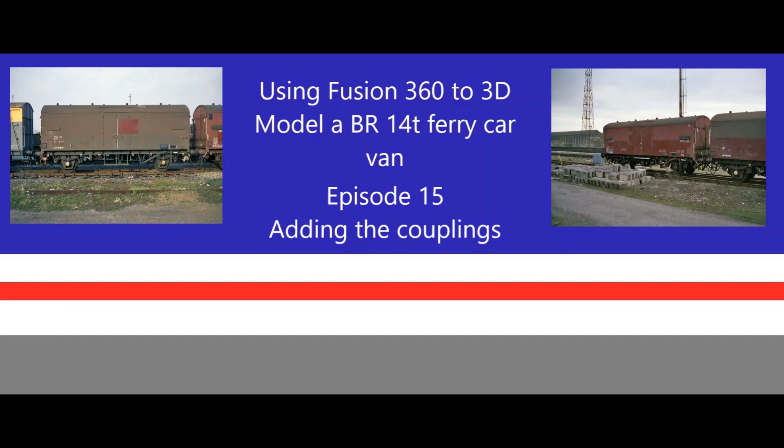In today's episode, I'm going to start by adding on the couplings and looking at some of the smaller details potentially that we can add in on the underframe and around the buffer beams.

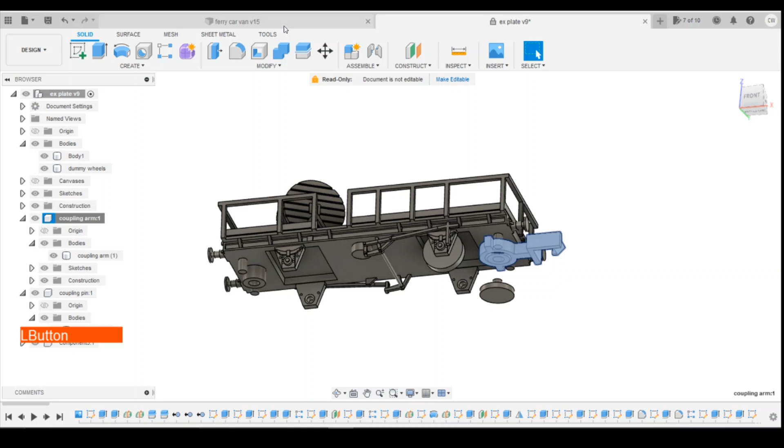So for the coupling, what I'm going to use is the coupling arm we designed for the electrification van a few episodes ago. So I'm just going to go and select the component, copy, come into the Ferry Car, and then paste new, and that should put the component in here. It's already listed as coupling arm, and then we've just got to move it around until we've got it in the correct position.

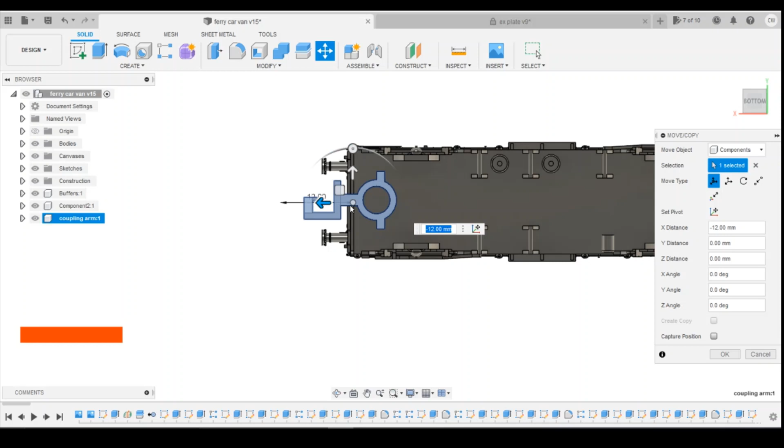So starting off, just going to move it across. I'm going to have to extend the coupling arm by the looks of it, so that the back of the coupling comes in line with the buffer here. So position wise, 12mm looks okay there. Left and right looks okay. We need to bring it up.

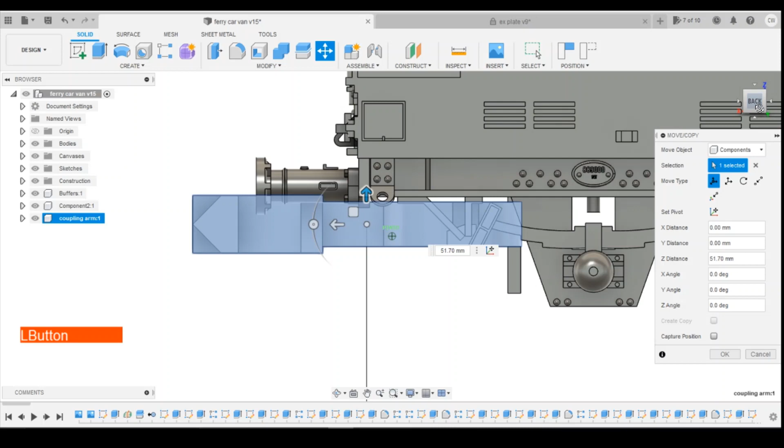Again, I'm not looking for perfection when I'm putting this in place, because obviously the coupling pin will be sitting through underneath. Okay, so I'm coming up to 51.7. Have a quick look round. Looks okay.

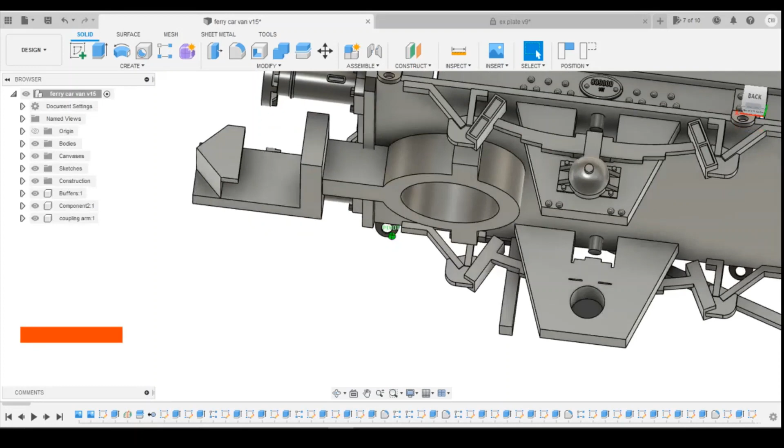Okay, so you can see how we've got this bit underneath, which is going to clash with the buffer beam here. So we've got two choices. We can either cut out some of the buffer beam, or we've got to do some work around the coupling to make it fit. I'm sort of inclined to go with making the coupling fit. So what I'm going to do first of all is cut the coupling.

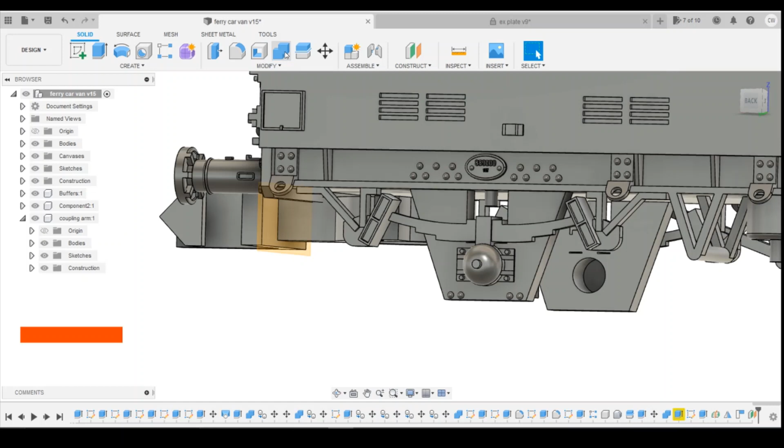I'm going to capture that position, create an offset plane on the back of the coupling face, and then I'm going to split that body using that offset plane. Should have two bodies now. I'm going to move the actual coupling itself to the left, so the back of the coupling is in line with the buffer, so you don't end up with buffer lock. For me, it's going to be about 2.1mm.

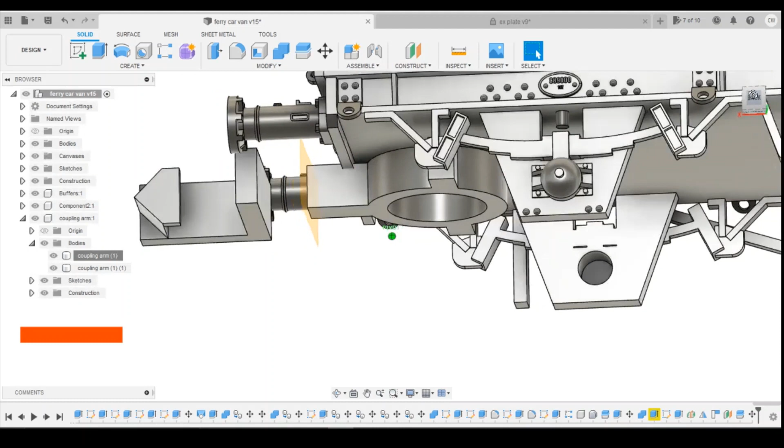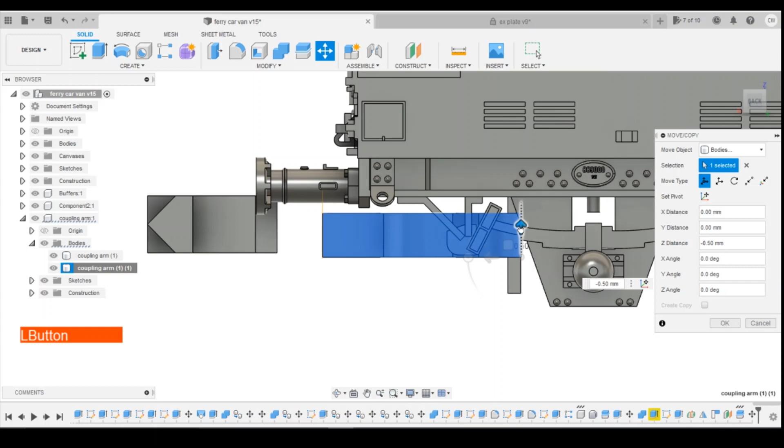Okay, and then I've got to work out what I'm going to do about this sitting underneath. So what I think I'm going to do is move this down. Move the body here, move that down. Yeah, by 0.5.

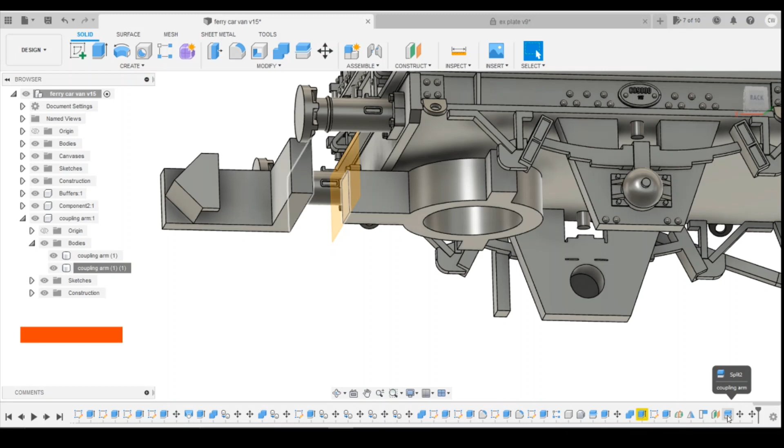Tell you what I will actually do, because I'm going to cheat slightly on this. I'm going to move this offset plane slightly. I'm just going to bring it in here by maybe 0.5, and then when it splits, I've got two faces, and then I can turn that construction plane off. This one. And then I can loft between those two faces.

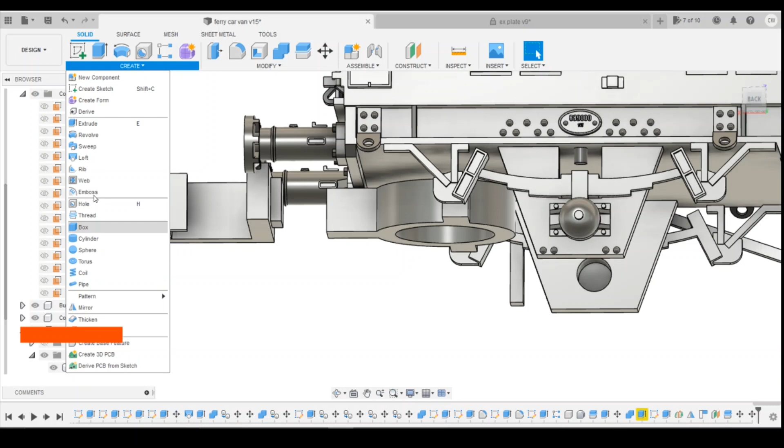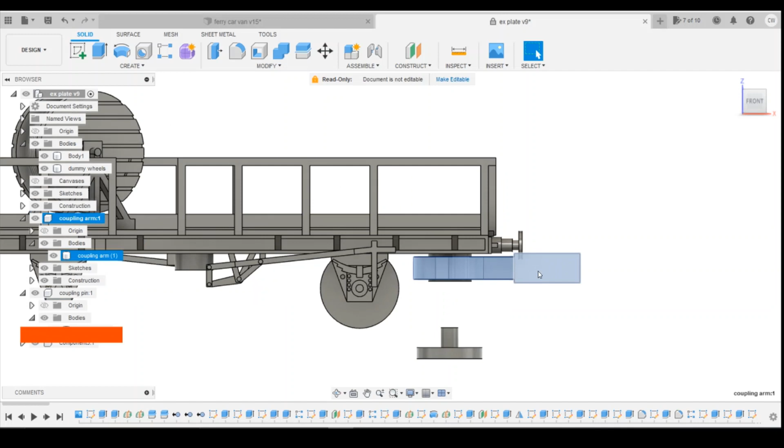So from that one puts that diagonal loft in there, which, although the pocket will be lower, brings the coupling up to the same height as what I would normally require. As you see, the coupling sits halfway through the buffers on everything, so that's going to work best.

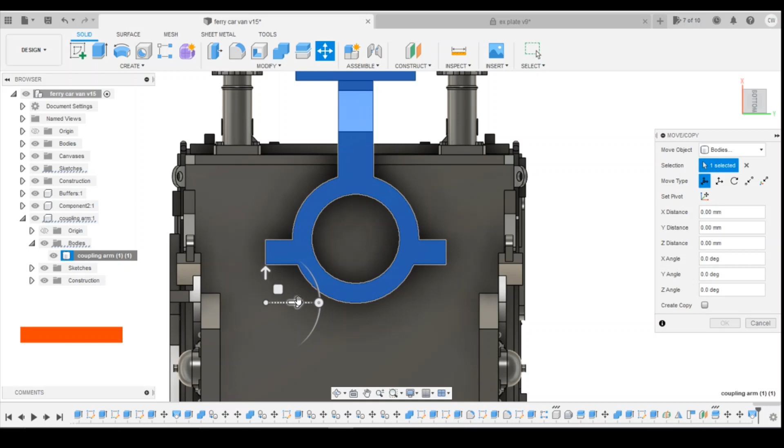Just wanted to try and centralise this a little bit. I've noticed it's a little bit offset to one side, so I've done some calculations. It's 3.36mm from this edge to the side here, 2.74 from this edge to this side. So I'm just going to move it across to the left. So I should be able to go minus 0.25.

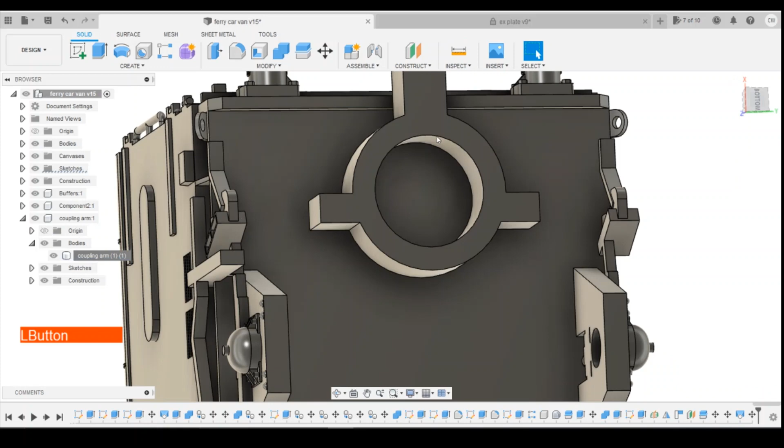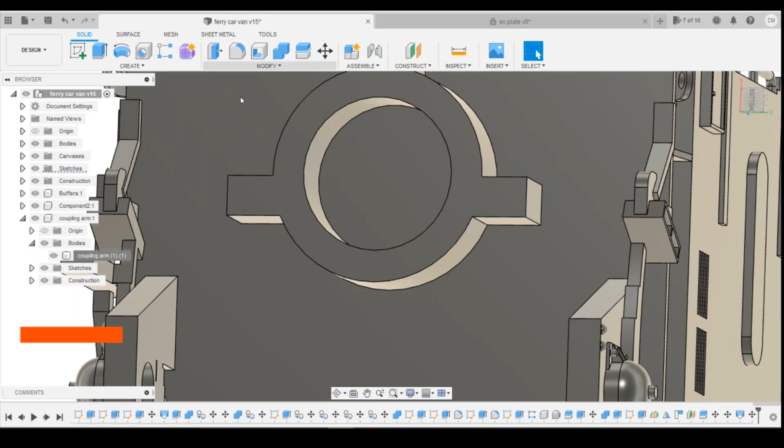And if I do the same inspection here, I'm going to check from that face to that face, I should have 3.11. Okay, doesn't make sense. Why? Yes, that's right. So 3.11. Inspect there to there. 2.99, so it's 12 difference, so it needs to go 0.06 to the left again. So I'm going to do another move on that coupling arm.

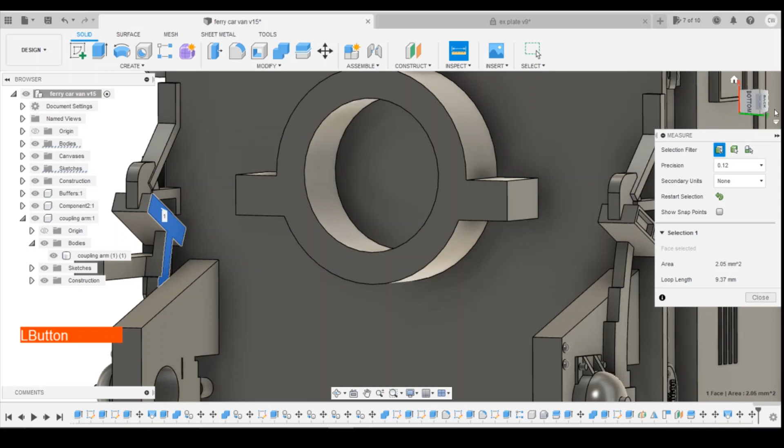Check that, that way. So minus 0.06. And that should now be spot on. There to there, 3.05, and inspect on the other side from there to there. Should be 3.05. So we're centered there. So the next thing I'm going to do is put the center boss in here.

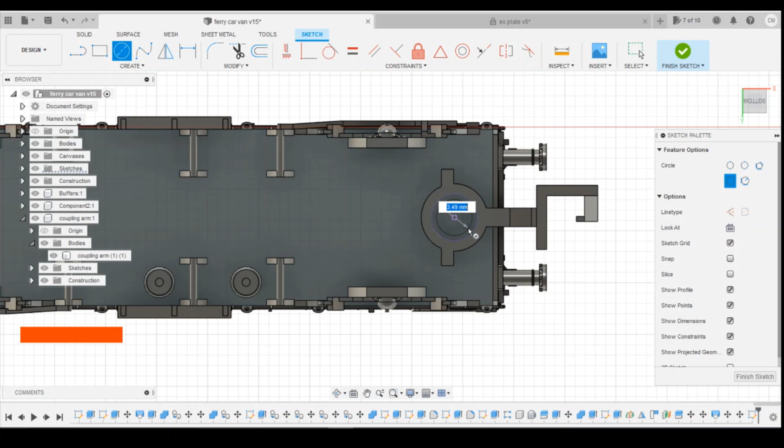We'll create a sketch on the bottom surface. I'm going to project the circle so that I get the center point, and then draw the circle in. So it's going to want to be 4 millimeters, I think. It's a 4.6 hole, so 4 millimeters gives me a little bit of play. And I'm going to extrude that to the same height as the coupling, and actually going to put just the tiniest little bit more on so that it's got a little bit sticking out. Type join.

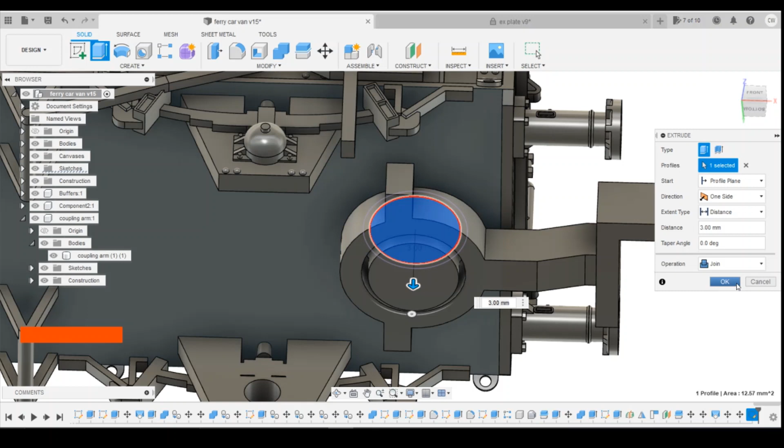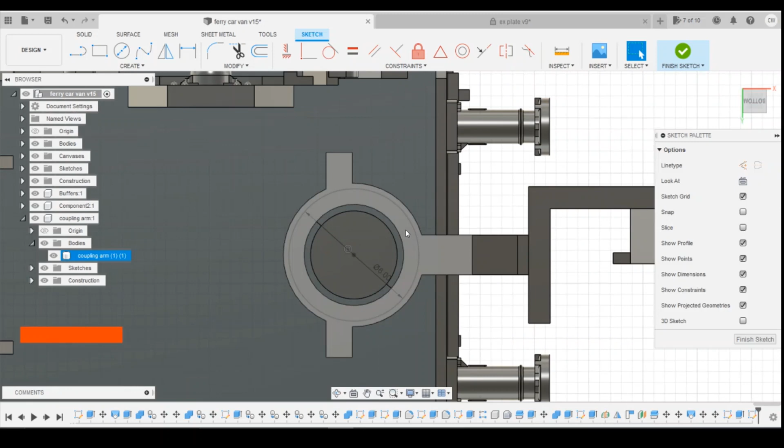And then I'm going to create another sketch on the bottom surface again. We'll use a circle again using that midpoint, and this time I want it to kind of sit on the coupling. So I'm going to do 6 millimeters. And I'm going to extrude, turn the coupling arm off, extrude that, turn it back on, to the bottom edge of the coupling.

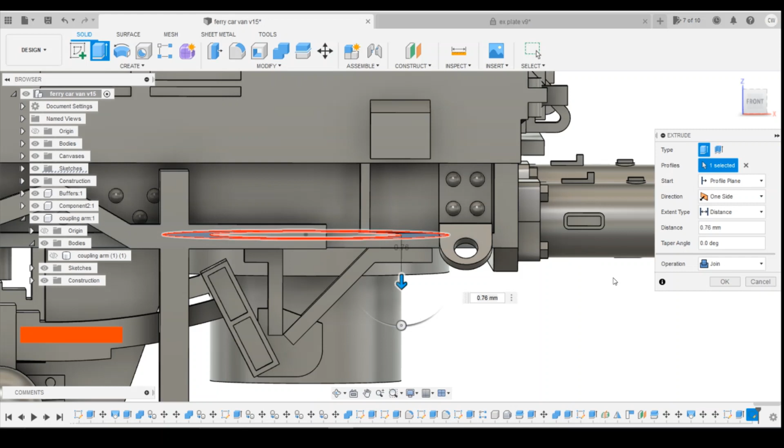And I'm going to turn the coupling arm back off so it's not visible, and then if I tell it to join, it'll just join to the body and it won't join to the coupling arm. If you leave the coupling arm visible, it'll join the coupling arm onto it. So we've now got that boss that the coupling arm will sit on to give us the gap underneath the buffer beam here.

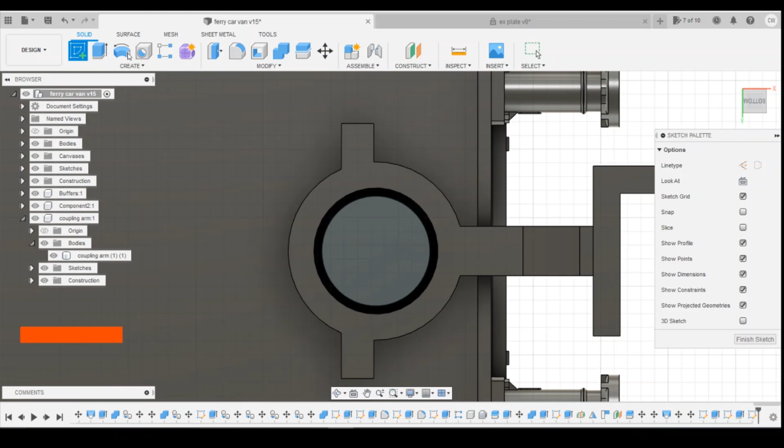And then we're going to draw the pin on this inner surface, again using the new sketch, and a 2 millimeter circle, and then I'm going to extrude that to the bottom surface of the body, tell it to cut.

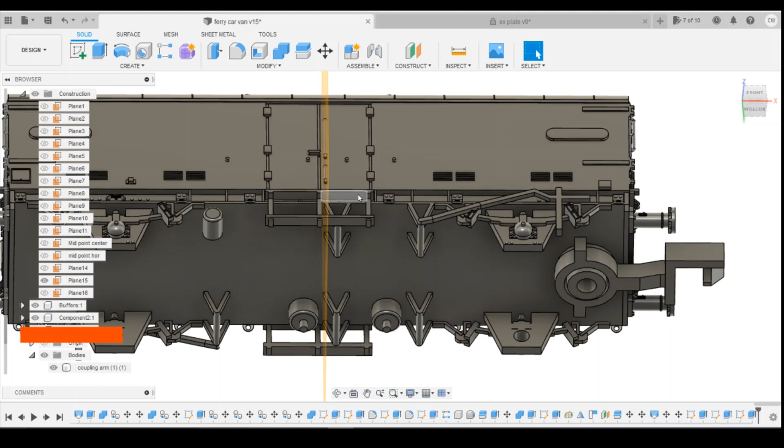Okay, and then we can mirror all these features across. And if you remember on the construction planes, we put a center plane in here. Just check that's the right one. No, that's not it. Mid point center, that's the one we're after. Turn those two off. So we've got mid point center.

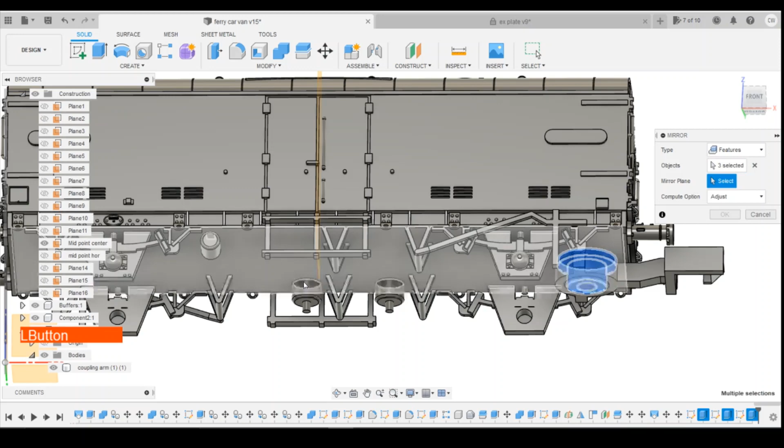So then I just have to mirror across these features. So that boss and the hole. Faces. Let's try again. Features. Mirror plane being that center plane there. And then that puts it across the other end.

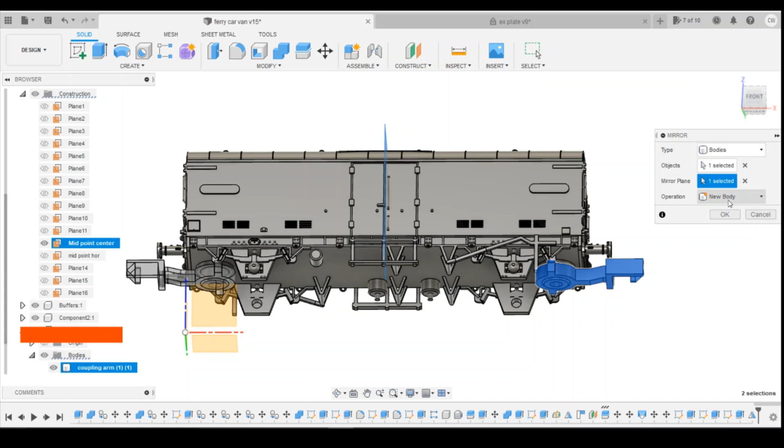And I can do the same with coupling. So I can just do mirror. And this time if I do bodies, select the coupling. Mirror plane again being that center plane. Leave that as a new body. Mirror that across. Okay, so let's just check we've only got one main body yet.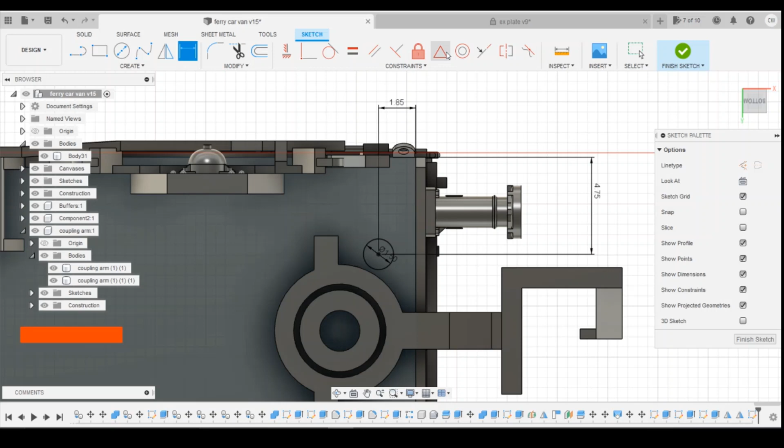And distance from there to there, we'll go for 1.85. And that will just give some play on the coupling there for going around corners, and then we can extrude that. And I'm going to have to come down far enough that it will catch the winglets there. 2mm, that's going to be halfway across there, that'll work. Let's join.

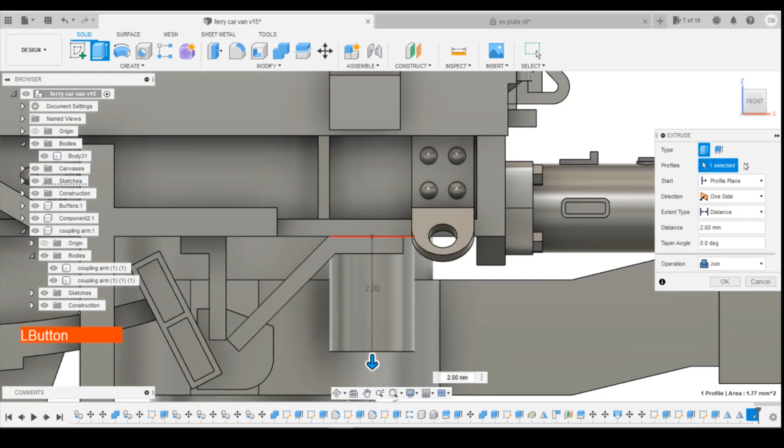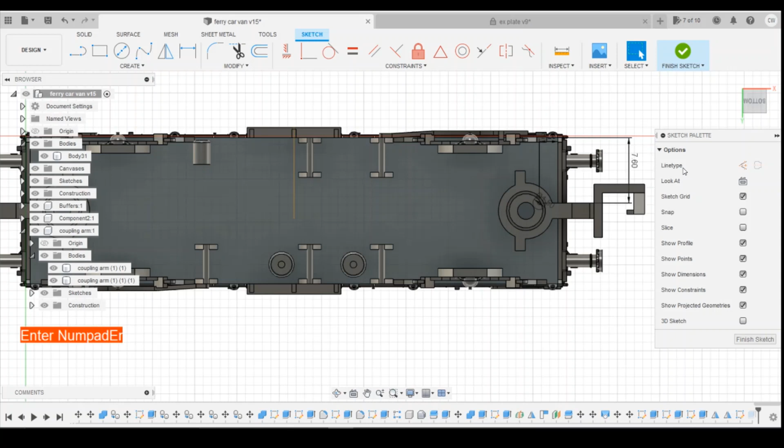Okay, so I'm just going to actually move this in slightly. I don't probably need quite so much play there, so let's go 2, and then bring this back to 4.6. Yeah, I'm going to go with that, and then we'll mirror this across. So we'll do the same thing again, mirror, and then features, select that feature, mirror plane. We've got the midpoint here.

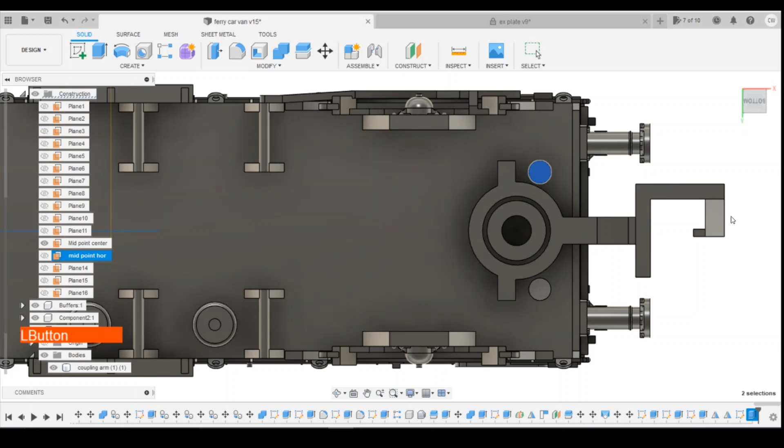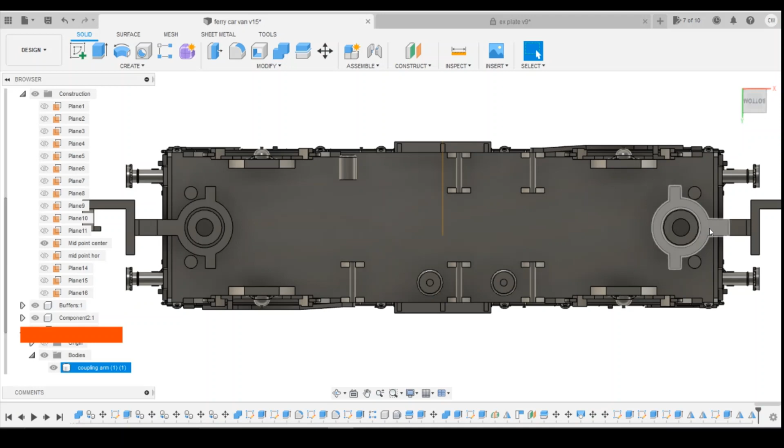Okay, and then we can again mirror those across, selecting the two features, and then the mirror plane being the mid-center point. That should put them at the other end. Obviously that might need a little bit of tweaking and adjusting, but I think that should give us enough play on the coupling that it's going to be free enough to go around tighter corners.

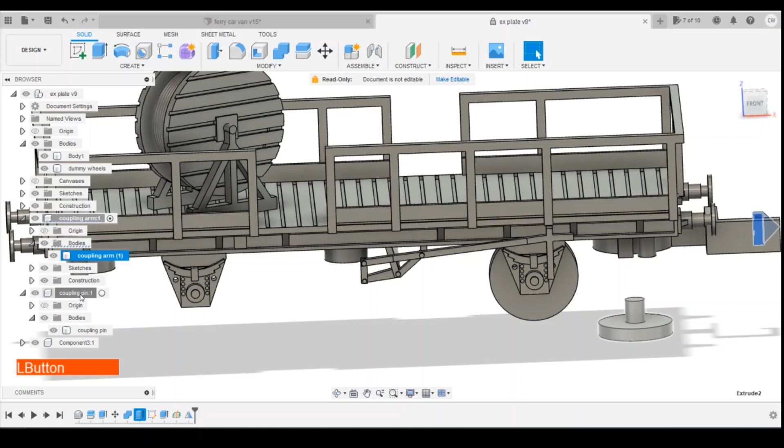Okay, so now we've got the coupling arms and the bosses. I'm going to go and collect up the coupling pins in this one. Find that. So it's in the coupling pin, so again we just copy that component, bring it in, and paste new. And try and line this up best we can.

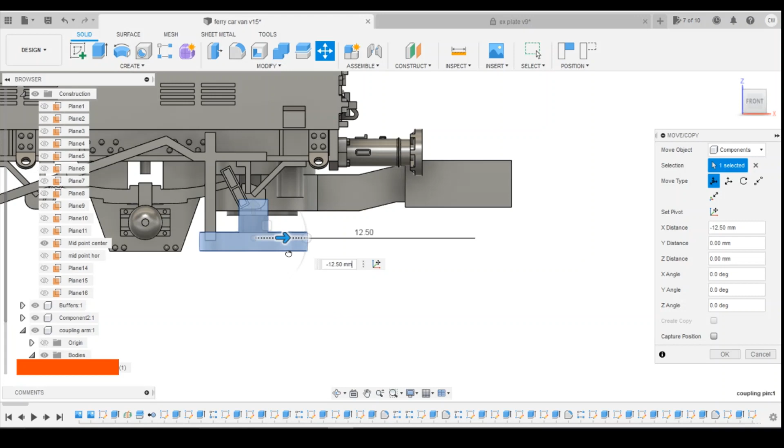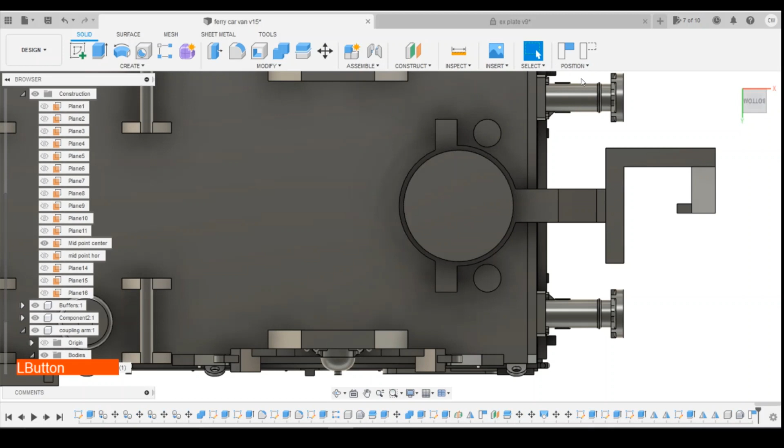Again, it doesn't have to be perfect, because at the end of the day it's not really part of the model, it's just there for show really. When we print it, that's when it's important it's in the perfect position, but you know, that's pretty much spot on there for me. So I can do that, and then mirror the capture position, I can mirror that component, or mirror that body, sorry.

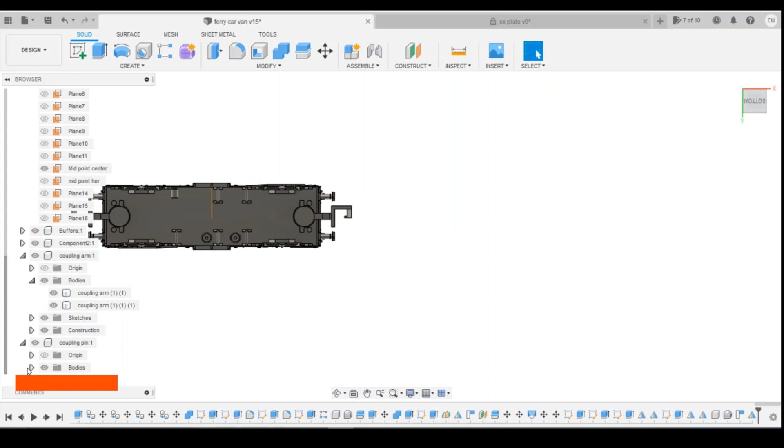Both ends. And there should be two bodies within that part there. 1, 2, again, that's more for aesthetics of the video rather than anything else, because ultimately it's going to print as a separate part.

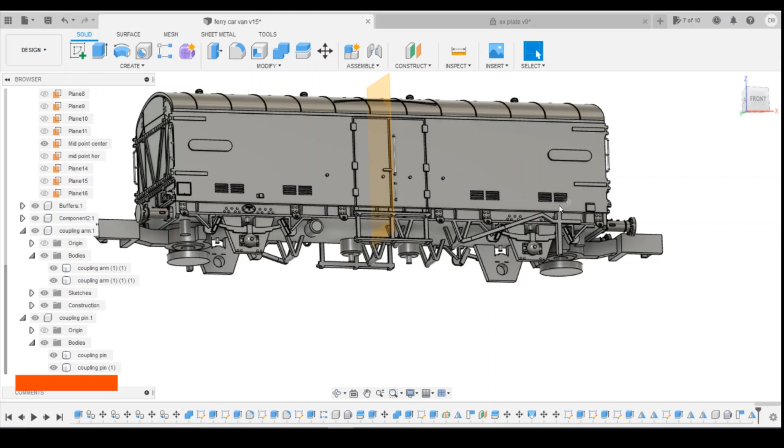Okay, so I'm going to finish this video here. It's probably 12 to 15 minutes of sorting out the couplings. I've got some detail for the underframe, but I'll do that in a separate video.